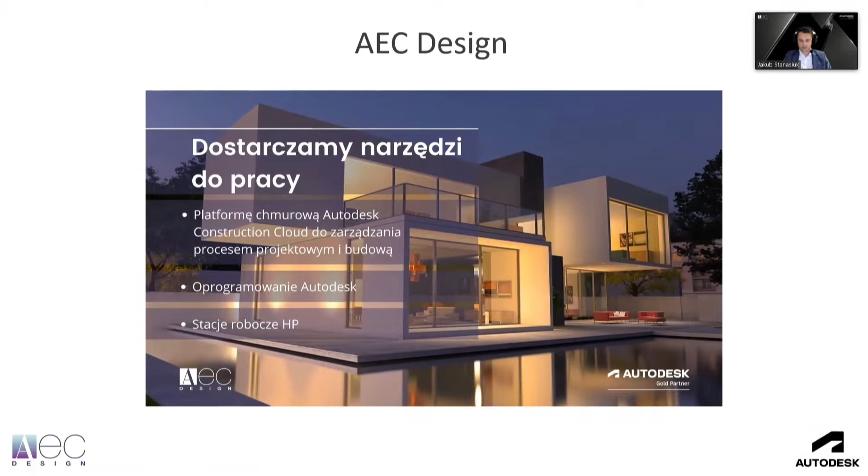We implement BIM methodology in organizations. We create BIM requirements, and we support clients during implementation, offering the BIM manager service, and during work we train, advise, and support sales of software and equipment, hardware.

Talking to customers, all the time we hear about challenges they face every day. The construction sector is well known for low margins. Based on studies worldwide, profit in this sector is only 5.5%. So even the smallest error may result in the project not being profitable.

Projects become more and more complex, and time schedules are getting shorter. So it's nothing strange that companies face delays.

Many of those challenges result in uncertainty and risk in the sector. About 80% of engineering and construction companies believe that risk related to projects is increasing.

Let's thus analyze 6 issues which may help us fulfill these challenges. In order to start having successes, you do not need to tackle all of them at once. Sometimes it is enough to implement 1 or 2 of them in order to see the outcome, the effect.

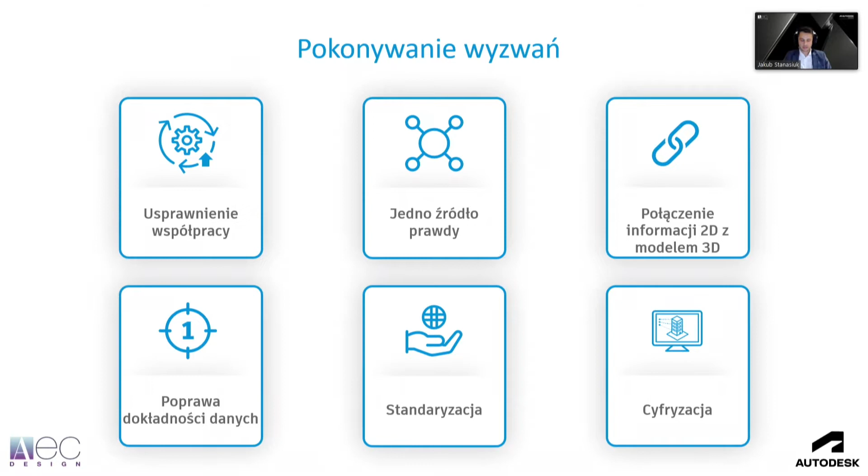In each project, the process of reporting comments or documentation will be similar. Finally, digitalization. Thanks to digitalization, we can get rid of gaps in conveying messages, information among teams.

All aspects mentioned before can be implemented in Autodesk Build service. This service supports teams, projects, companies in a mutually interrelated way, and it provides each team member with appropriate tools necessary to do the work and to cooperate with other individuals, at the same time supporting digitalization of tasks and centralized data processing.

It allows managing all project documents in one place in order to make certain that all team members are working based on the latest data set. Finally, we have constant insight into the project. We can quickly draw conclusions from the data and problems from the site and respond to them much faster.

The possibilities mentioned earlier do not end with Autodesk Build. Autodesk Build is part of Autodesk Construction Cloud, which combines data and processes across the entire life cycle of the building. Autodesk Docs is part of the platform and is also, in other words, playing the role of platform for data exchange.

Apart from sharing data, it enables analysis, acceptance of documentation, and it is dedicated to all participants of the investment process.

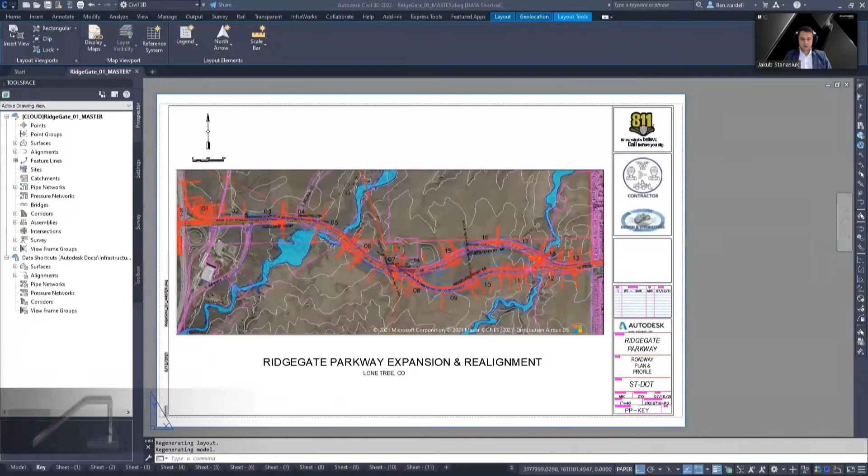A structured process of documentation gives us certainty that each and every member of the team always has access to up-to-date data. Documentation elaborated by the team in Civil 3D or Revit can be easily made available in the platform. During importing, OCR functions in the platform allow automatically allocating names to documents in accordance with information included in the drawing table.

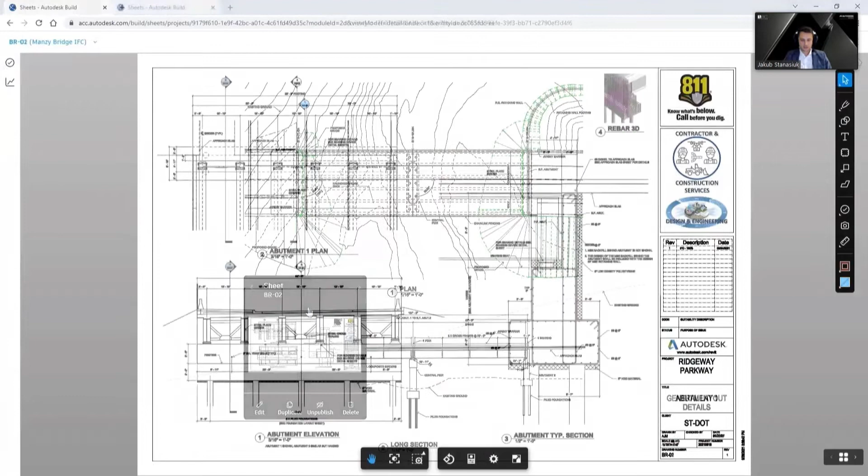Then we can move on to analysis of documentation and placing a reference on drawings, reference to other sheets. Users may search for files interesting to them based on the name of the file or additional attributes. Apart from the possibility to analyze documentation itself, we also have access to other files used at the site.

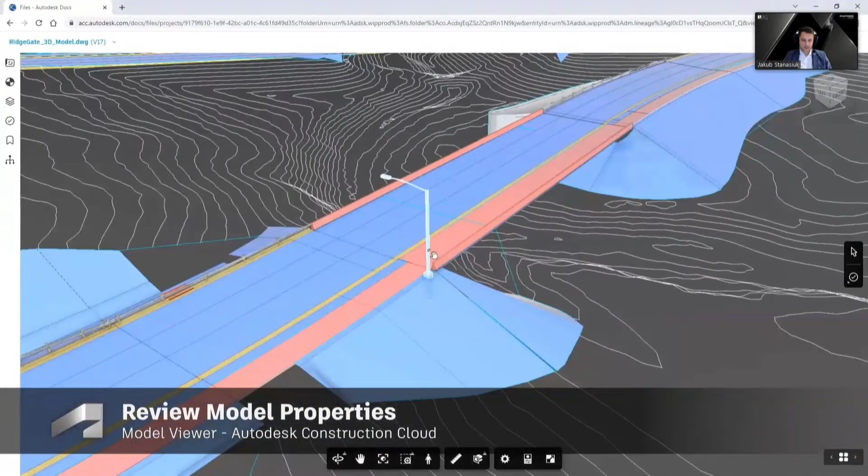We also have a possibility to review models, BIM models, including reading information from individual components.

Automatic allocating of versions to documentation helps co-sharing data. A new version is created each time a new file of the same name is being created. Users can easily compare various versions of documents through color coding of differences between versions.

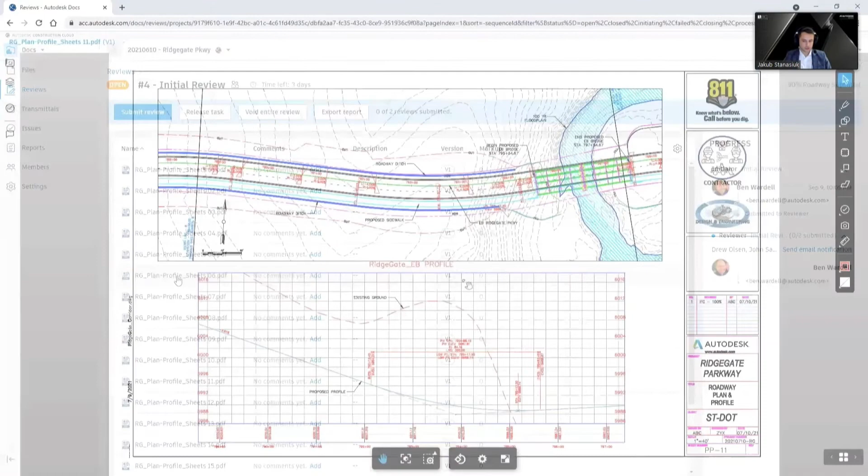In order to send files for approval, we use the reviews function. It allows us to select our own paths of approval, which automates and speeds up the whole process. After launching approval, consecutive people on this path have the possibility to analyze documentation, add comments, markups, and create issues. Whereas an individual at the end of that path has the possibility to allocate the status of approval of the documentation.

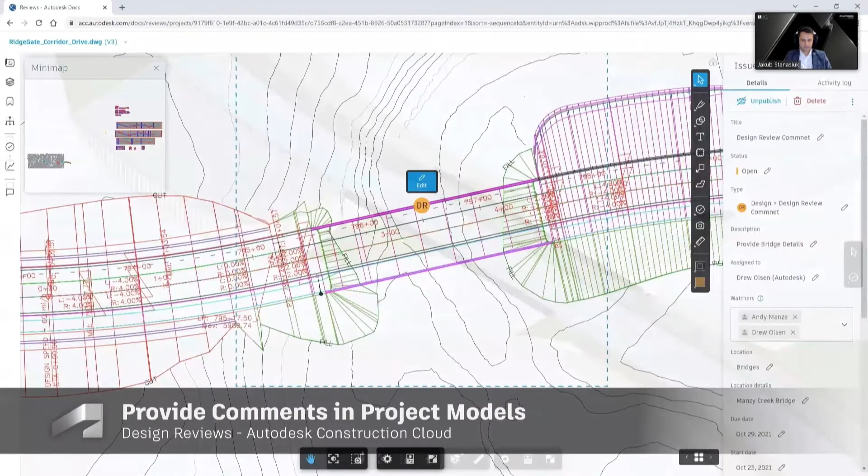Having concluded the process, we have the possibility to export a report, including all information placed by people being on the path.

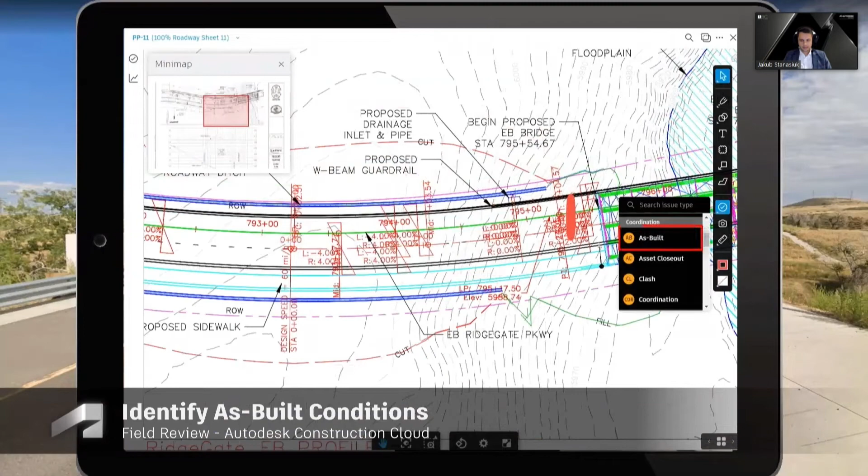The next important process is quality management, comprising managing comments and quality control with the use of control lists. Effective comments control is important in quality control. Users have the possibility to define their own category of notifications, in drawings 2D or a BIM model.

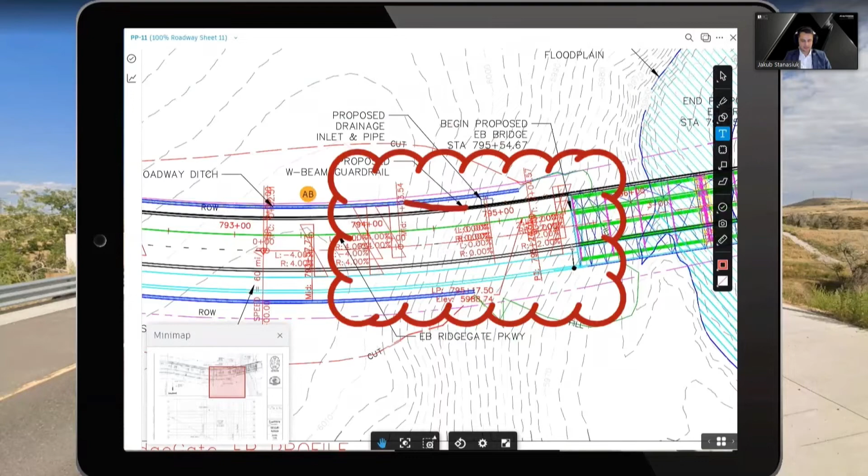Additional attributes can be attached to notifications, and people get automatic notification of such a comment. After that, we can right away start introducing modifications in our project, give a response, and change the status of the notification or comment.

Tracing of all comments is possible from the level of a digital register, where authorized people can filter comments and read information about such comments.

Appropriate planning is one of the first steps to ensure quality. For this purpose, teams can prepare templates of control lists using built-in functionality, or import a PDF template used in the organization. We can define the way of adding to the list, who is authorized to add to the list, and add any questions or responses to the list, or even enforce a signature.

Those completed lists can be selected and sent to appointed individuals. Users, when adding, can add photos, problems, or files to the list.

The next benefit of the list is the possibility to add to them from the level of mobile applications. Users go through individual items on the list, give answers, and in case of lack of compliance in any of the items, they have the possibility to create a problem and attach a photo to the comment directly from the site.

The function of comments and control lists can also be used to manage safety at site. The first step can include planning of safety at site, starting from elaborating templates, which later can be used for doing inspections or trainings. Templates can be created from scratch on the platform.

We can also import company templates, which can later be expanded, like the form. Templates elaborated like this can then be passed on to further projects.

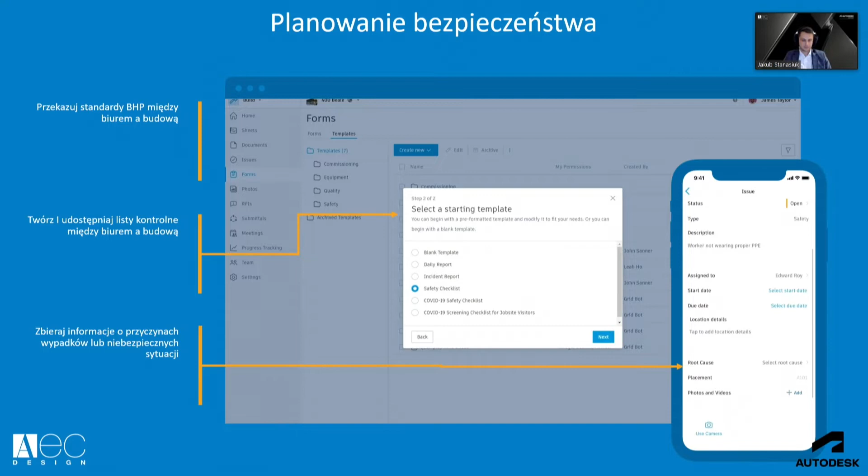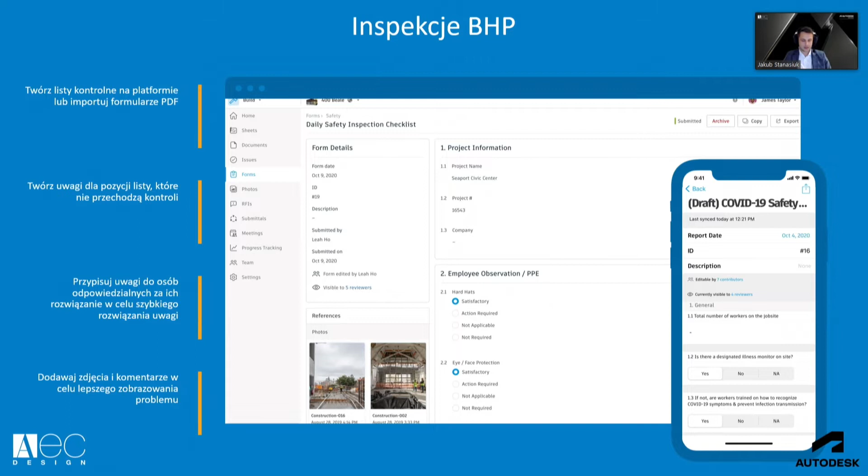Elaborated templates can next be used at site, or from a mobile application we can add information in the form during the work health and safety inspection. When adding to the form, we can do notifications, add photographs and comments in order to better describe the problem.

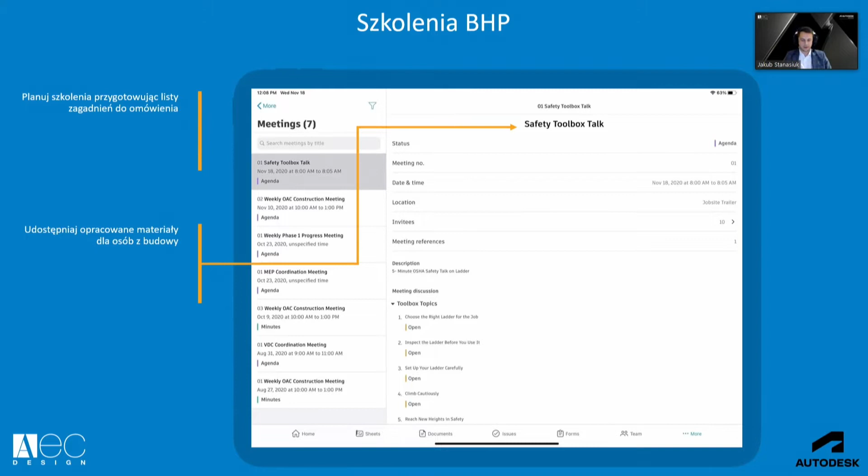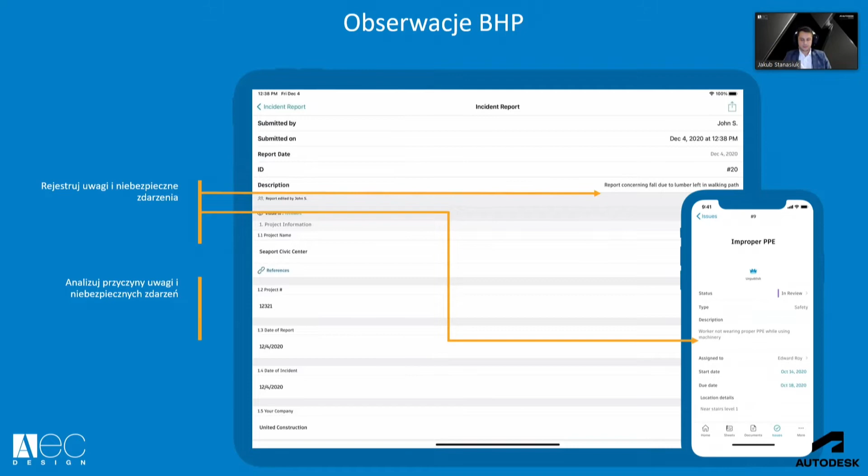Forms and control lists may also be used during work health and safety training, thanks to which we will have the certainty that we have discussed all issues significant for the given task. We can also raise comments, allocate people to situations notified of, or inform of potentially dangerous situations.

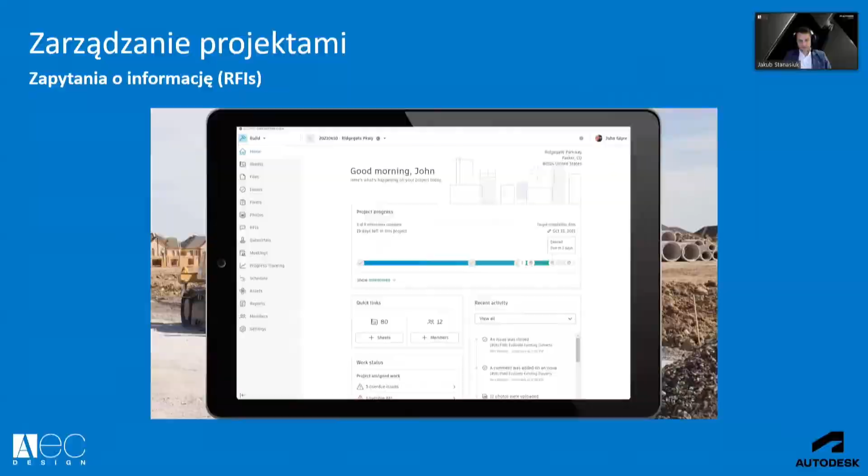Autodesk Build also supports the process of managing projects. During implementation of every project, so-called RFIs appear, meaning inquiries.

In Build we can create them, adding information, files, or photographs. With RFIs we can attach an appropriate allocation in the drawing, and addressees of the questions have the possibility to add references and comments placed in the documentation.

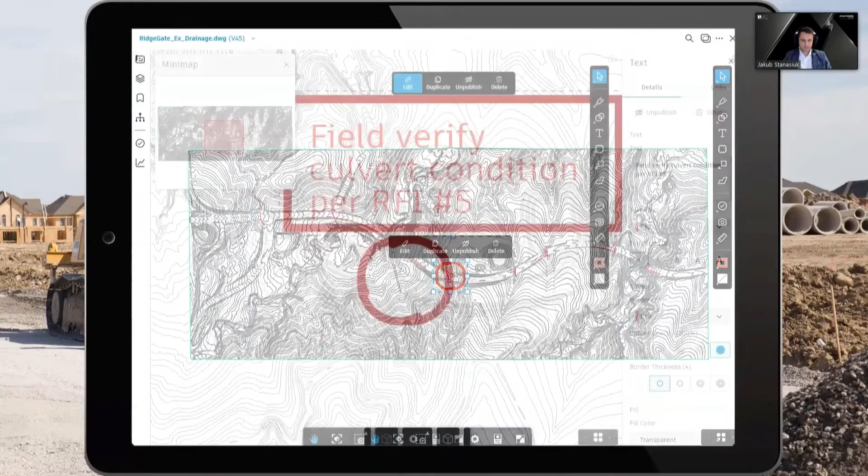All RFI files can be located in one register where you can easily modify them, manage them, or get information.

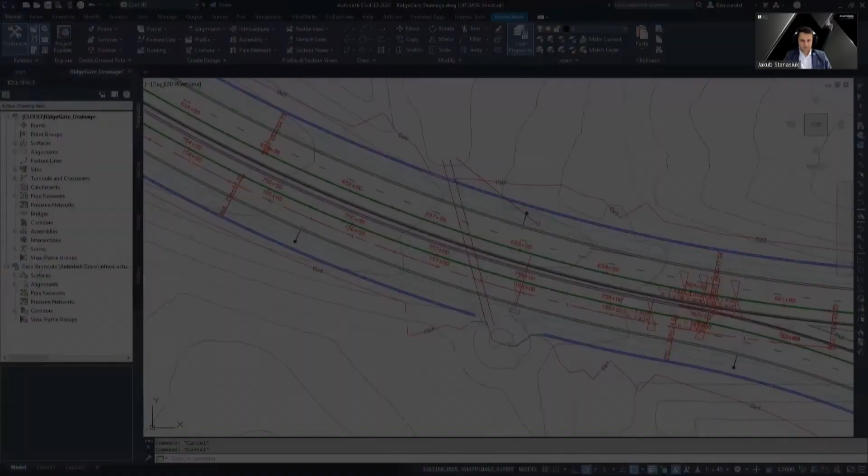If the need arises to modify the project or change the documentation, the changes can be directly and clearly indicated on the drawings.

When the reply is provided, the stakeholders are notified about the response, and we have information about the full history of the inquiry.

Build also allows you to carry out a more official acceptance process of the documentation. In this case, the approval process is linked with specification items, and you can add some more information.

The party responsible for sending the documentation gets a notification and can attach documents requiring acceptance.

People responsible for approval can review the attached files and change the status of approval. When the document files are approved, they become available for other team members.

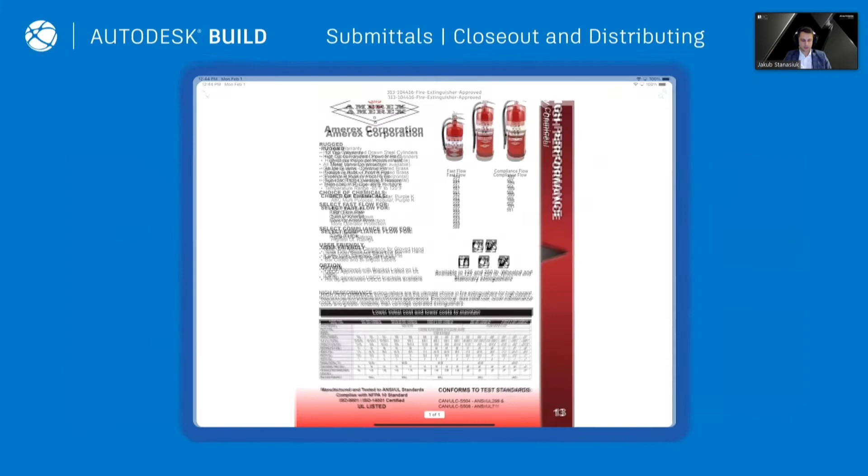From the mobile application level, you can filter approvals and review the attached documentation.

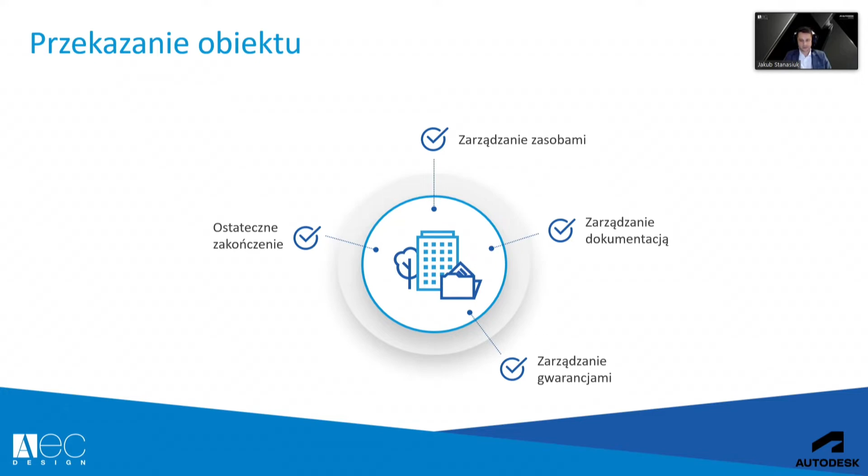When the facility is completed, there is commissioning. Build allows you to create resources which can be monitored in the implementation phase to track implementation, and when in operation to review resources, and when needed, to carry out inspection or report a problem.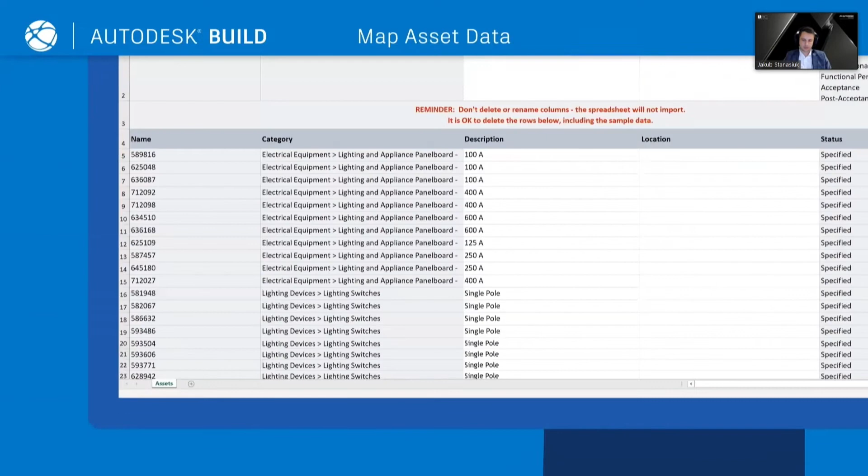The resources can be quickly and easily imported to the platform with the download function. First, you need to download the template, add the necessary information, and then you can import it.

Build allows you also to assign to resources information on their status on site, and to define additional attributes and assign them to individual categories of assets.

Since Build is based on a CDE platform, it is easy to get access to all the information needed, like machine equipment documents, training documents, user manuals, or warranty documents. All this information can be easily assigned to individual resources imported to the platform.

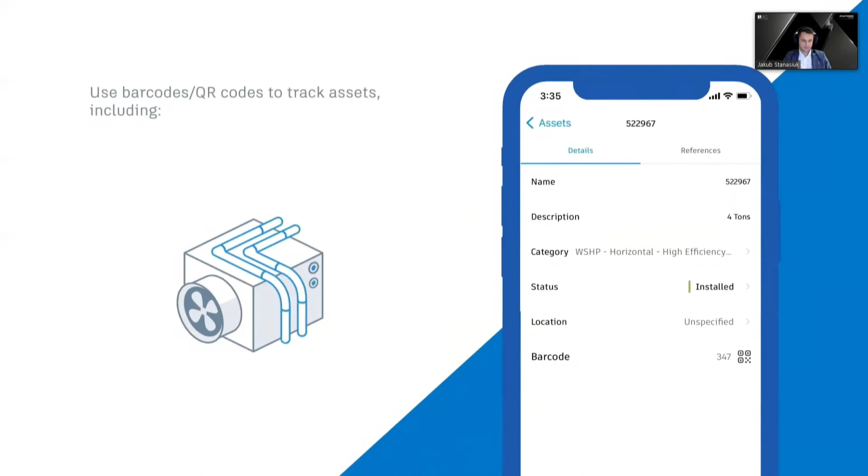The mobile application, with the possibility of scanning QR codes and barcodes located on pieces of equipment, allows you to quickly access data on this piece of equipment, and also allows you to make a report on an individual asset.

Quick passing of information on defects to people responsible for solving those can quickly improve solving of the problem. Inspection of machines can also be carried out with the previously discussed forms.

The ACC platform allows you also to analyze all the data gathered in individual modules. With creation of a dashboard, the teams have a quick view into the situation on site.

They can track progress of projects, quickly go to important aspects, review and filter recent activities, or analyze required actions to be completed by the users, and have information on the level of synchronization of the mobile application with the platform by the users.

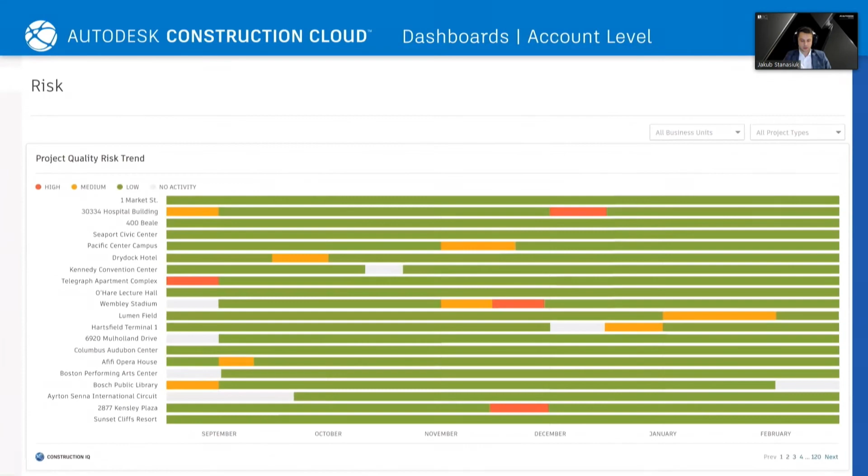The management can view dashboards from different projects. They can analyze data, and if need be, concentrate their attention on individual tasks or projects.

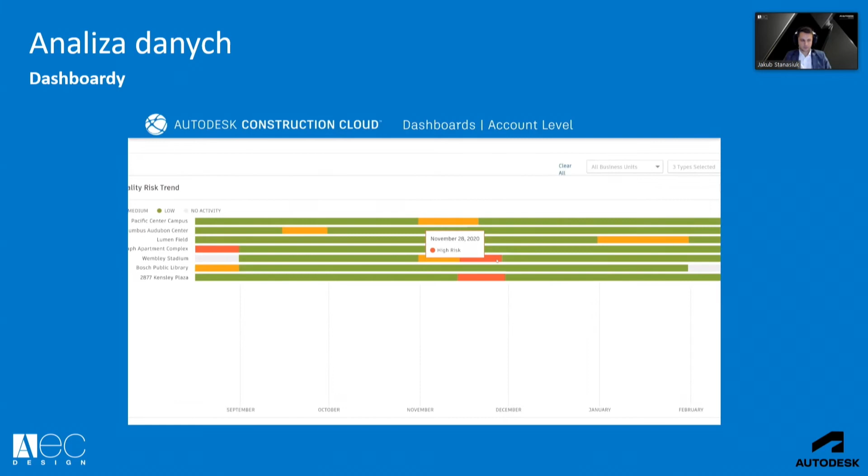At any time, you can also create a report based on a predefined template. You define the report form. Optionally, you can filter data and define how to sort it, and finally generate your report.

When the report is generated, you can download it or send it, or even plan the creation or sending of individual reports.

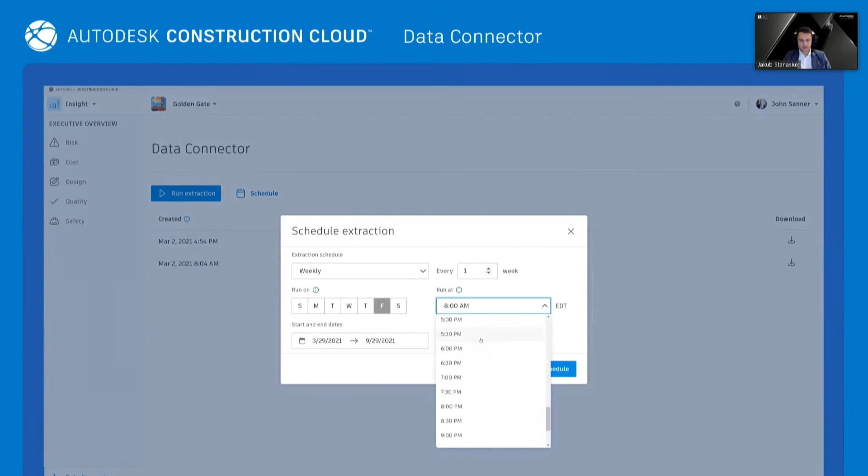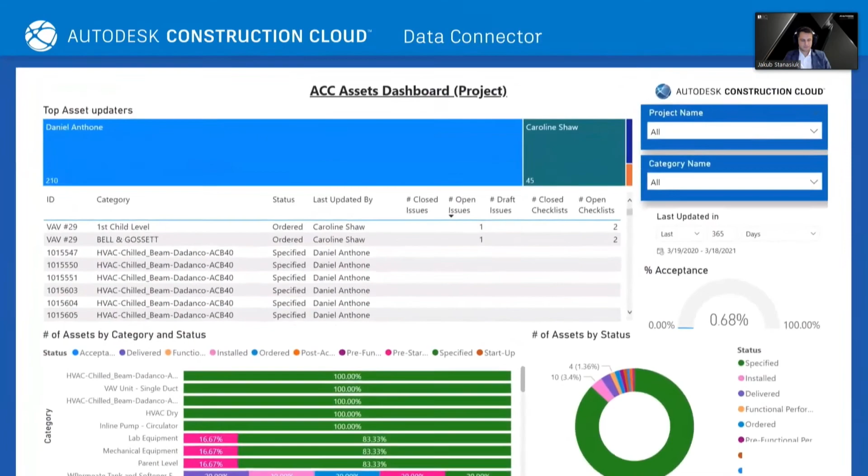If you want to analyze your data in Power BI, you can plan the frequency of sending data and ensure any people in your organization can take decisions based on the analysis carried out in Power BI. These are informed decisions.

This analysis can also be displayed on a dashboard on the platform.

Autodesk Construction Cloud facilitates management of your accounts and projects. On the platform, you can create a new project based on predefined templates. This allows you to maintain the same standards throughout the organization.

For each project, you can invite new users and assign to them individual rights to folders, files, or reports. It is also worth mentioning that the project can be joined by other people from outside the team if they have a license for Autodesk Construction Cloud.

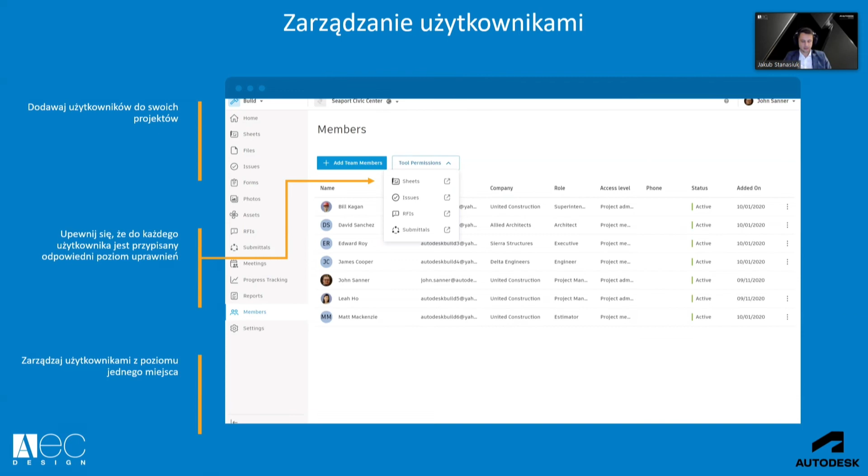The ACC platform allows easy and intuitive navigation between the modules. Moreover, shared files or reports will be visible in all the modules without the need to move from one module to another.

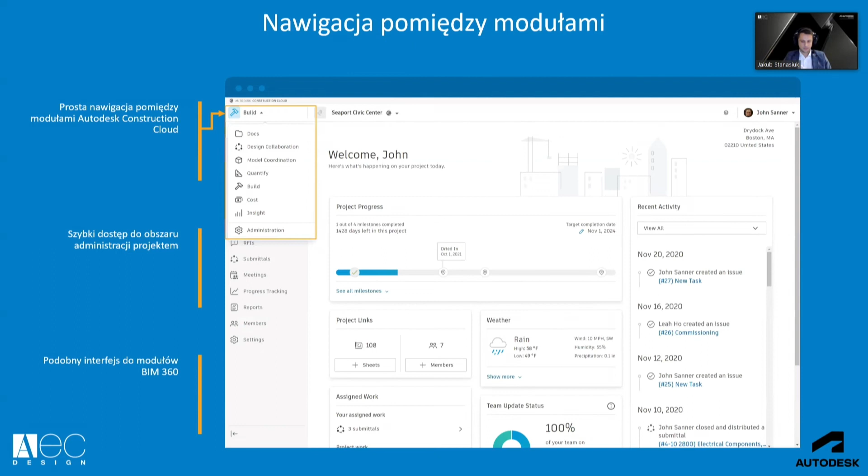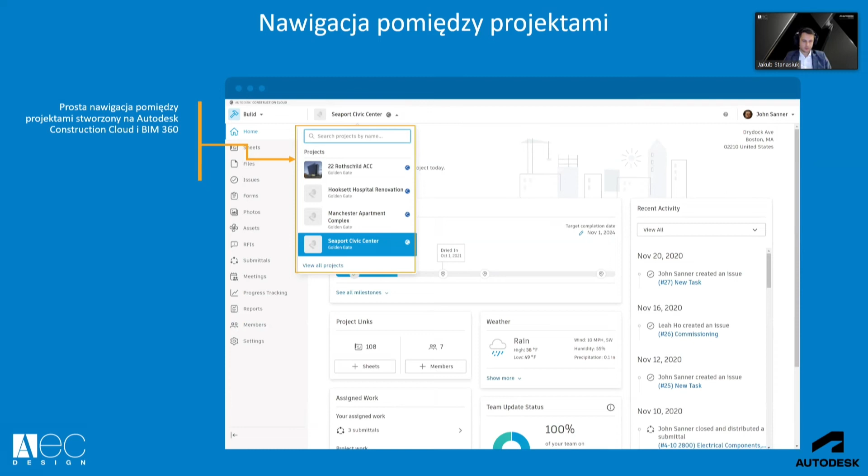So you not only can navigate among modules, but you can also easily go from one project to another based on Autodesk Construction Cloud. You can also have access to the projects created in BIM 360.

Autodesk Build changes how you carry out construction projects, combining functionalities with simple but efficient tools to work on site. It allows you to create connections between project data, which we get and generate, to get a comprehensive image of the project progress. You can participate in the project and manage your data regardless of whether you are owner, general contractor, or subcontractor.